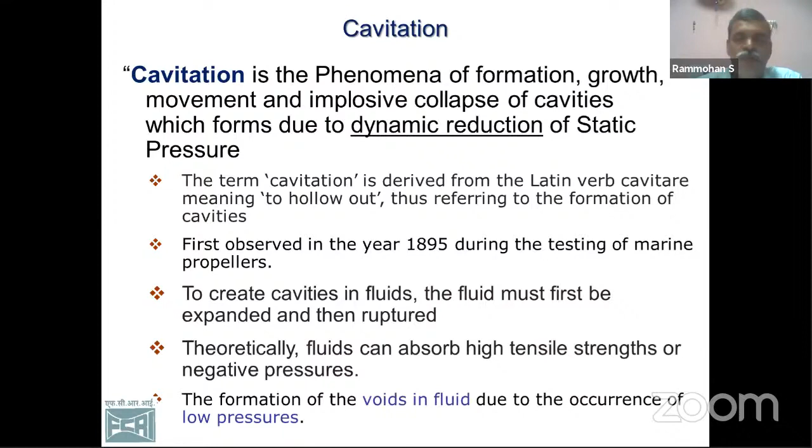So when the pressure goes below the vapor pressure, vapor bubbles will be formed. These bubbles, as they move along the fluid to a higher pressure area, cannot remain as bubbles, so they collapse. And that is what we basically call cavitation.

So this jet is the cause for damage in cavitation. If the bubble is placed close to the wall of the pipe, this entire jet will hit onto the wall, and the velocity of this liquid jet will be of the order of 100 meters per second or more.

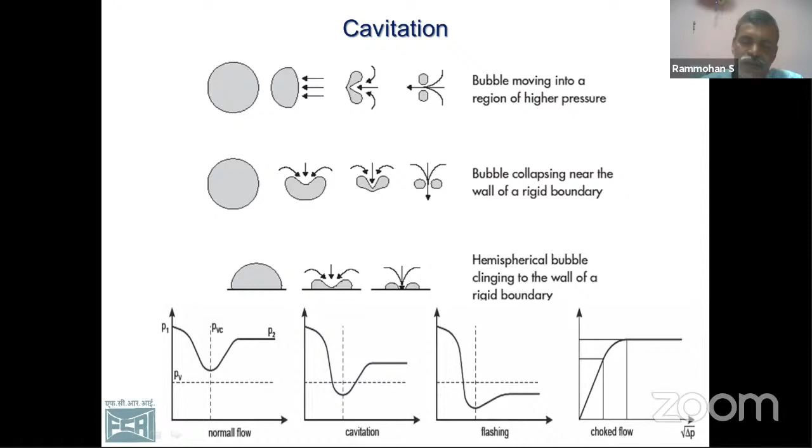So at the outlet of the valve we get only vapors, and we call it flashing. That means the liquid has flashed into vapor. So that is the basic theory of cavitation, and there are basically 3 to 4 types or levels of cavitation.

Incipient cavitation is basically the starting of cavitation. This we can hear as we go close to a valve or orifice plate, you can hear this popping sound. And normally this is acceptable for operation because it will not create much erosion issues, so incipient cavitation is acceptable in the industry.

Critical cavitation means cavitation is taking place continuously. Some places also use this critical cavitation zone, because if you want to reduce the cavitation, the cost of that reduction will be quite high, so people live with cavitation. So in incipient cavitation and constant cavitation, this type of valve is normally used.

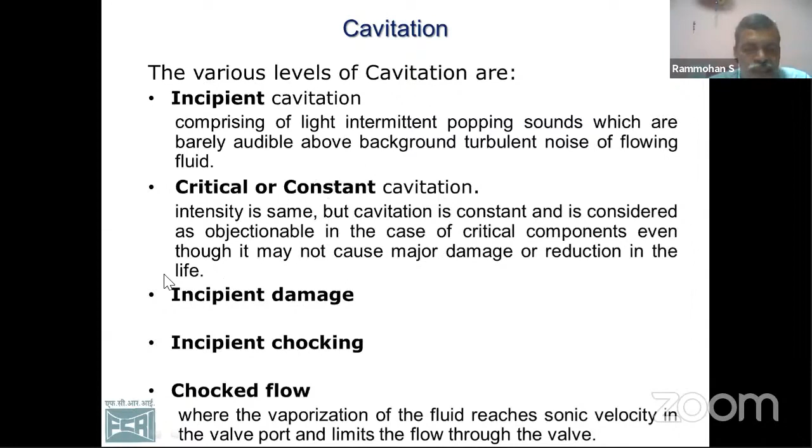Then we have incipient damage and finally choking. These two regions we don't normally operate the system in, but the earlier regions we normally operate the system so that even if there is cavitation, it is affordable. So that is what normally the different levels of cavitation that is experienced in valves or pumps or all those items where the pressure can go below the vapor pressure.

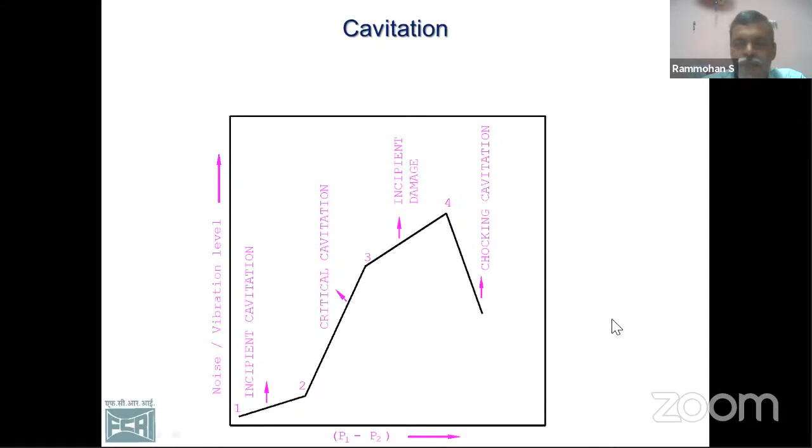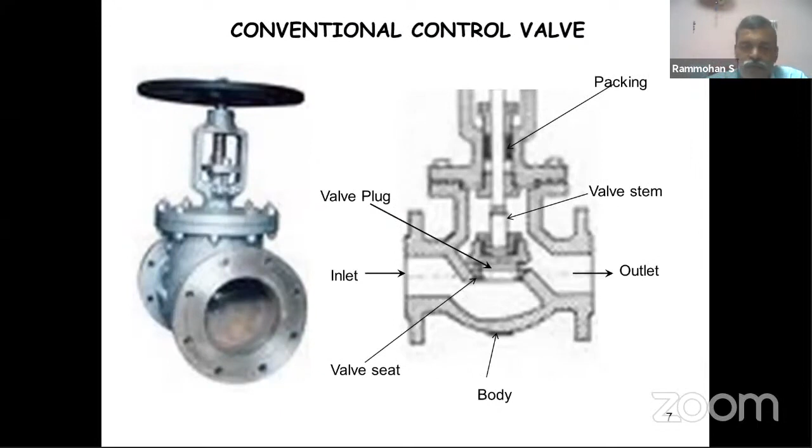The cage is the static member and the plug will be a moving member. The cage may be having different profiles made on it, in the form of holes or some shapes. As the plug moves into the cage, the area of opening changes, and the flow and pressure drop across the valve changes, and accordingly we get a similar pattern.

Whereas in the case of butterfly valves, ball valves and such, we have a rotating member that rotates 90 degrees. As it comes close to the closed position, the area of opening will be very less. When the area of opening is very less, dynamic pressure will increase, velocity will increase considerably, and that will result in reduction in static pressure, and here it can go below the vapor pressure.

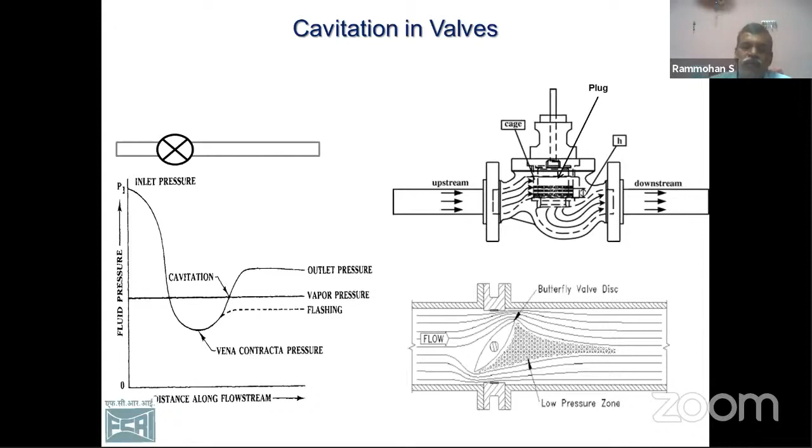And apart from that, in the case of these butterfly valves and ball valves, there is a provision for wake formation downstream of this, which also adds to the cavitation behavior. So now let us see what are the issues associated with cavitation.

The main issue is erosion. In the case of valves, there are basically 3 identified areas for cavitation erosion. One is the incubation area, where the cavitation is started. There will be a small amount of loss of weight, but it is not measurable, so we don't know whether the valve is operating in the incubation period or not.

After the incubation, we reach the constant erosion region, where the slope of erosion is higher, meaning loss in weight over time is greater, so material loss from the valve is quite high. When the material loss becomes high, the surface undergoes something similar to heat treatment, so the hardness of the surface increases.

Then the material erosion will come down. We call this the strongly fractured area, where core erosion will be less. So we are more worried about the earlier two regions in control valves, especially where the pressure drop is very high.

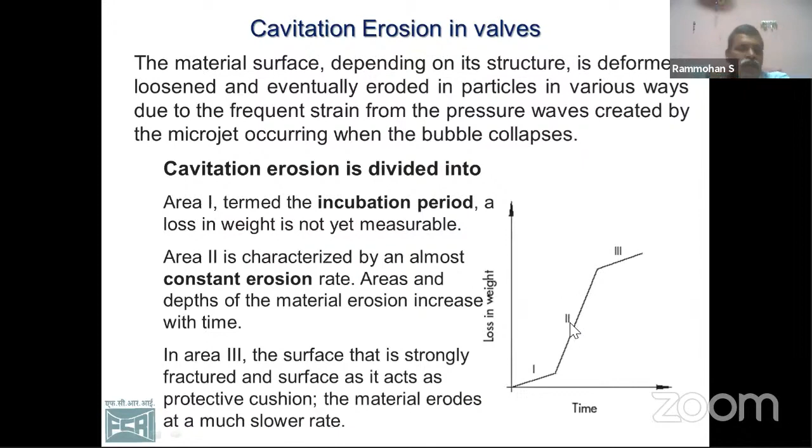Cavitation is normally measured with the help of visual studies. We cannot quantify these things. This is basically a quality evaluation, not a quantity evaluation, so we are not much worried about these things.

Basically, we measure fluid-borne noise, structure-borne noise, or airborne noise. Fluid-borne noise is normally measured with the help of hydrophones, which are nothing but pressure transmitters, basically dynamic pressure transducers, having very high sensitivity, sensing dynamic pressure fluctuations in the flow.

Structure-borne noise due to cavitation: in fluid-borne noise, due to the collapse of the bubble, pressure waves will be generated, and that pressure wave will be in the form of dynamic pressure pulsation, measured by the hydrophone. The same pressure pulsations hit the wall of the pipe or the body of the valve and make it produce noise, and it will vibrate. So noise is measured with the help of hydrophone, whereas vibration is normally measured with the help of an accelerometer.

So normally we use hydrophone, accelerometer, or microphone for measuring the intensity of cavitation.

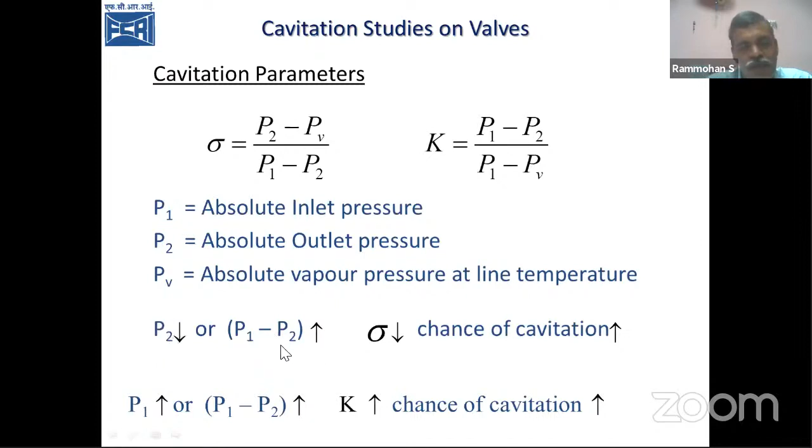So in most cases we play with P2, because pump pressure will be constant, so inlet pressure P1 will be constant. So the only thing we do is reduce P2 and ensure that the valve is cavitating.

This is a typical scheme for measuring cavitation. Here we have the test valve. This is the scheme which I used for my research activities. We have a larger size pipe before the valve so that we get maximum flow and maximum pressure that is reduced further. Then we have the test valve somewhere here, and we take it back to this thing.

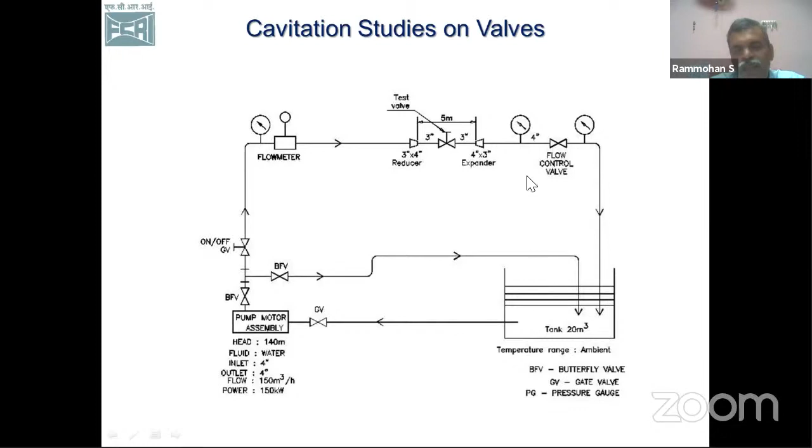So here we have to measure the entrapped air in the water. Then we have to measure the temperature of water. Then we use different sensors like hydrophone, accelerometers, and dynamic pressure transducers for measuring. So this is a scheme of experimentation that we normally use for measuring cavitation.

The hydrophone is normally placed flush with the fluid surface so that whatever pressure fluctuations or dynamic pressure fluctuations are caused by the valve will be picked up by the hydrophone.

Vibrations generated by the hitting of pressure waves on the pipe wall and valve wall will be picked up by the accelerometers. We have not used any sound level meters for this; we have suitable signal analyzing equipment, and that will be connected to a data acquisition system so that we can process the data online or offline to get the required output.

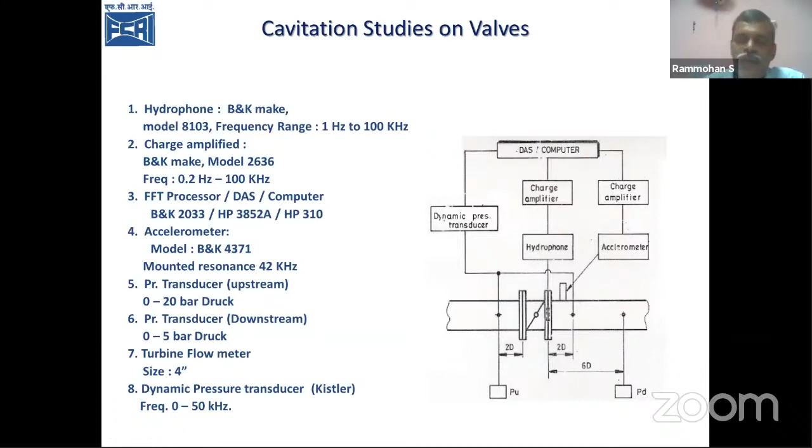So these were some of the profiles what we have used. This is the valve. So what we used is valves of different sizes. Basically here only we used CFD for getting the results. Initially we started with a normal valve, then we tried valves with different profiles and all those things.

This is the valve cage and this is the valve plug. During operation, this cage will be fixed onto the valve and the plug will be moving according to the movement of the handle of the valve.

So we have different configurations. All these trials we have done with CFD, and it was evaluated experimentally also, so that in future the same scheme can be used for predicting cavitation in valves. That's what was the objective of this thing.

The study was conducted on a 75 mm valve, that is a 3-inch valve, and the movement of this valve was only 17.5 millimeters. This is a typical plug and cage commercial design which we refined for our application.

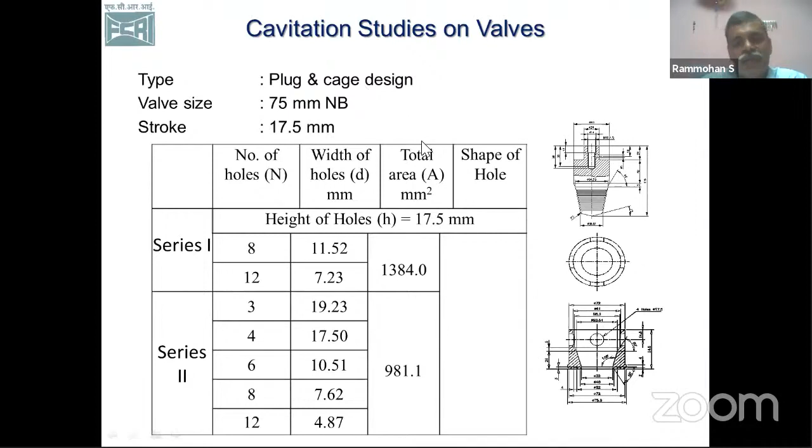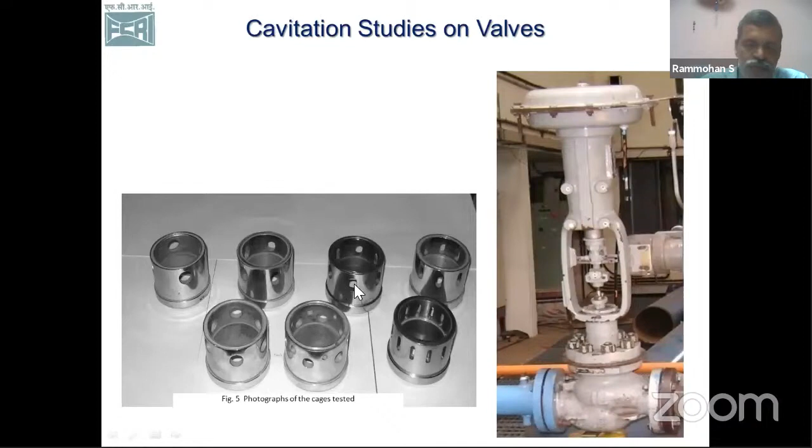So this is the valve what we are using. This is the valve body and this is the moving mechanism we have. This is connected here, this is the valve cage. Plug what I have not included. So as the valve moves into it, part of this hole will be covered by the plug, and through the remaining part water flows.

This is another type we have done for some of our customers. Same studies we have done. So this is the scheme what we have.

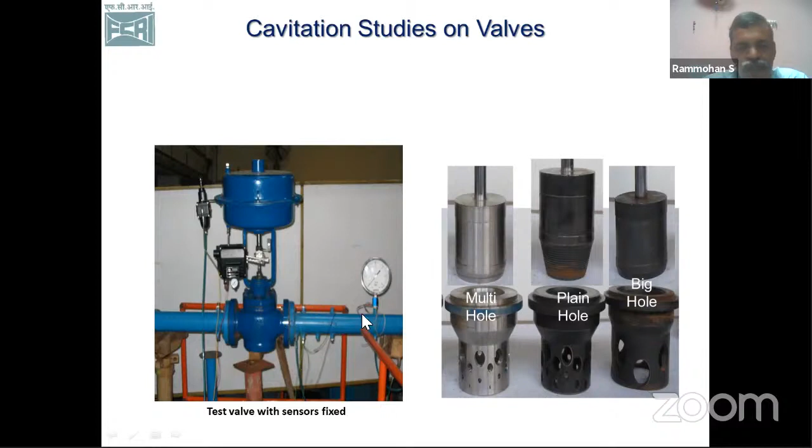So to measure or to see the bubbles that have been generated, we have put a perspex or transparent section after the valve, so you can see the small bubbles that are being generated during the operation.

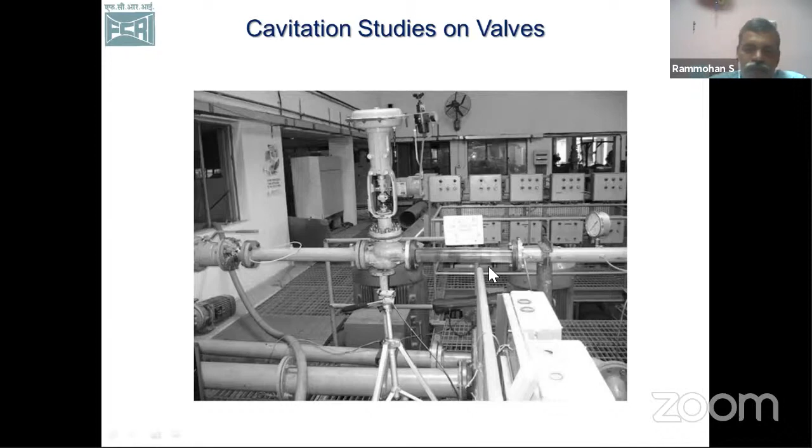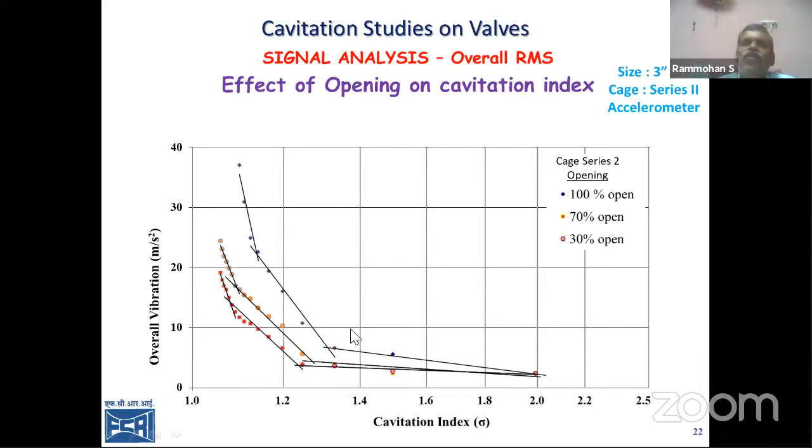You can see the slope change points also moving towards the right, which is saying that this corresponds to 100%, this corresponds to 70%, this corresponds to 30%. So you can see the valve will cavitate early in the case of 100%, but as we reduce the opening, the starting cavitation point also moves to a higher differential.

So this is how we define the valve. We fit the line and we take the R square value. For these two cases, the R square is quite comfortable, but here it is not comfortable, this fit is not quite good, but these two fits are good. You can see there is a clear change of slope taking place. The slope has changed from minus 219 to minus 71, which says that there is a clear change in the cavitation pattern.

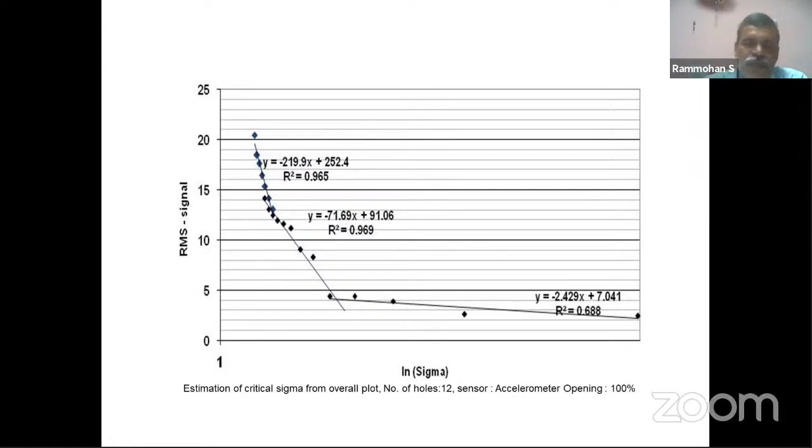So this is another example where we have the same full opening valve, but different areas of the opening were considered.

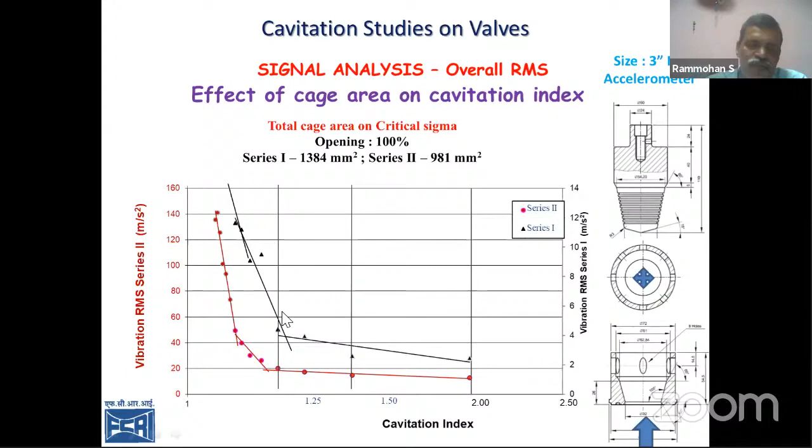Another aspect of what we do is we take the same accelerometer output through an FFT analyzer, that means we do a fast Fourier transform of the data. There we get peaks at higher frequencies, and this is normally due to cavitation, because the frequency of these high amplitude areas is basically depending upon the size of the bubble. As the size of the bubble decreases, the frequency increases.

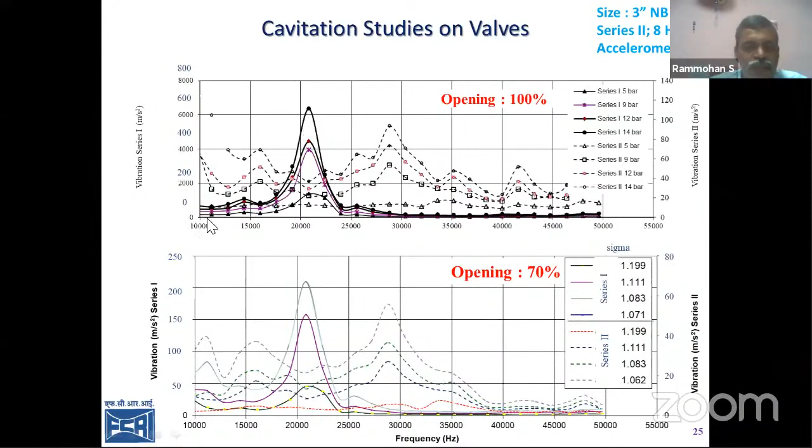So we assume that the mechanical vibrations and everything are removed, and only the pressure fluctuations or whatever is due to cavitation alone is considered. So we remove the data below 10 kilohertz.

We define the pressure inlet and outlet and assume that there is no slip at the boundary. Standard material properties available in Fluent were used for these fluids. Initially we started with single phase with water alone, later we did the same experiment with water and water vapor, with air entrainment inside the fluids.

So finally in our final studies we used tetrahedral grids, and we were using something more than 1 lakh sample elements for covering the core area of the valve.

Initially we tried with 10D upstream and 20D downstream so that we are able to get the complete pressure recovery inside the valve. So we defined the pressure inlet 10D upstream of the valve and pressure outlet 20D downstream of the valve, assuming that full pressure recovery is taking place after cavitation inside the valve.

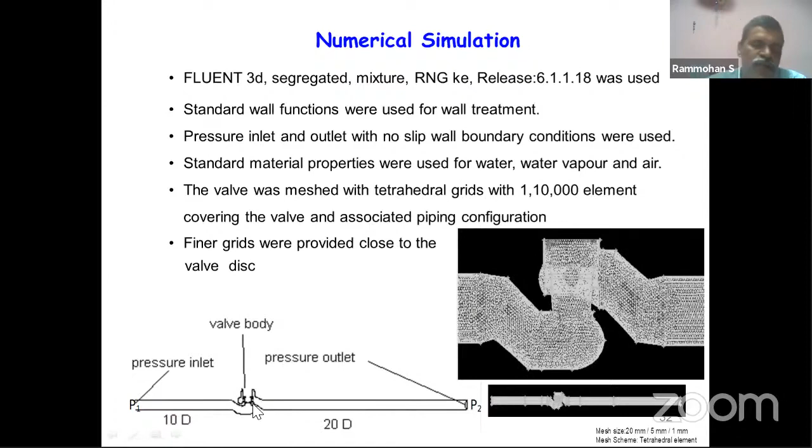Basic assumptions were that the flow is three-dimensional, incompressible. We assume that since we have provided the 10D upstream diameter with flow straighteners and all, the flow is uniform and unidirectional at the inlet, and there is no velocity at the surface of this thing. Turbulence was modeled with the two equation k-epsilon model.

And in our second phase, that is the mixture model, we used void fraction of 0 at the inlet, assuming that there is no air entrainment inside the water.

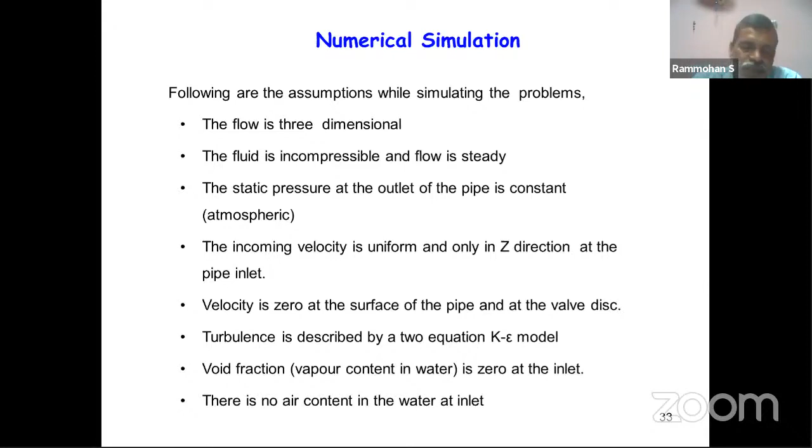So with this we studied, we varied the inlet pressure from 0.1 megapascal to 1.7 megapascal, which is equivalent to 1 bar to 17 bar pressure at the inlet, and outlet pressure was maintained because it was freely going to atmosphere.

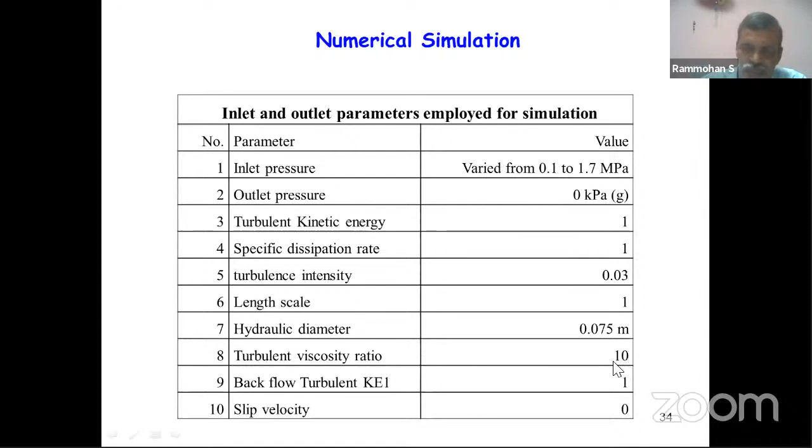So that is what it means. Outlet pressure is 0 because we use gauge pressures. Initially, we started with turbulent kinetic energy as 1, specific dissipation rate as 1, and hydraulic diameter as 0.075 meters because we tried with the 3-inch valve. Turbulent viscosity ratio considered for initial starting was 10. With these conditions and the material properties, we took it directly from Fluent.

No modifications were done. With these trials, we modeled this thing initially. This is for just trials we have done. So we tried with the 5 mm mesh size and 20 mm mesh size, and we found that 5 mm is good. So this is profile one.

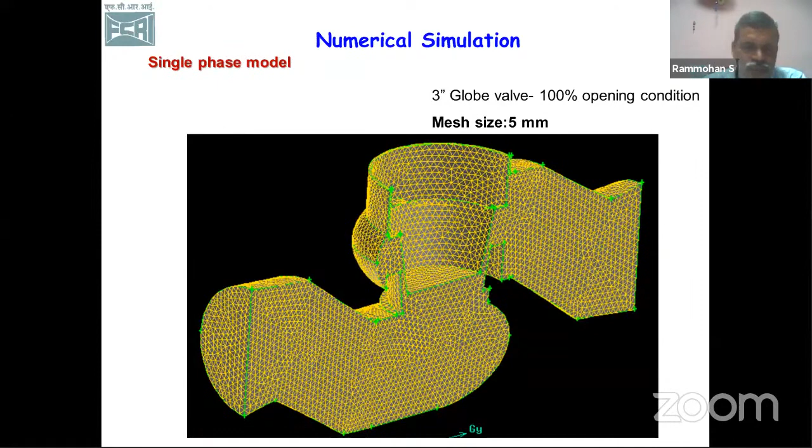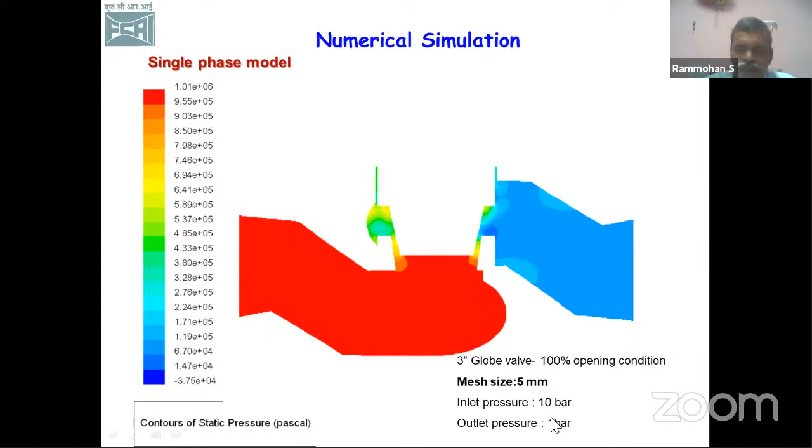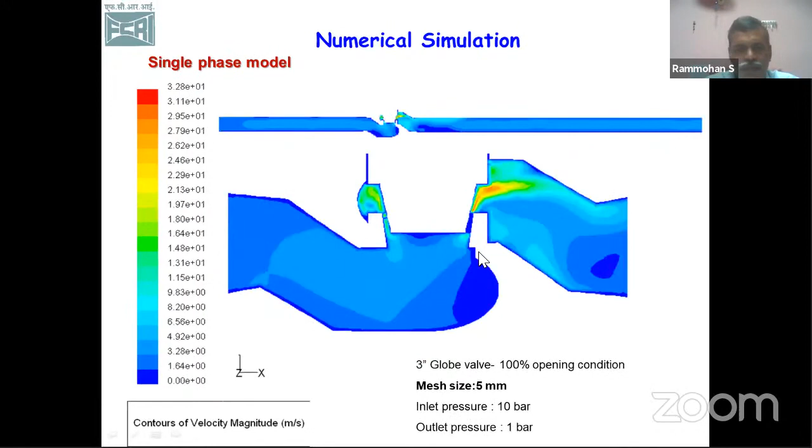Same thing, this is the velocity magnitude. Here the area is very small, so we get maximum flow here, and we have minimum static pressure here. We must start with Bernoulli's equation. This is the velocity vectors. Maximum velocity is taking place here, so because of this, these are all complementary issues.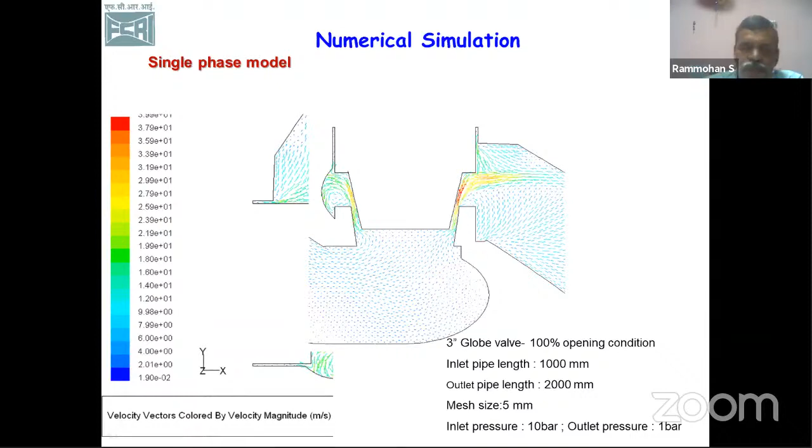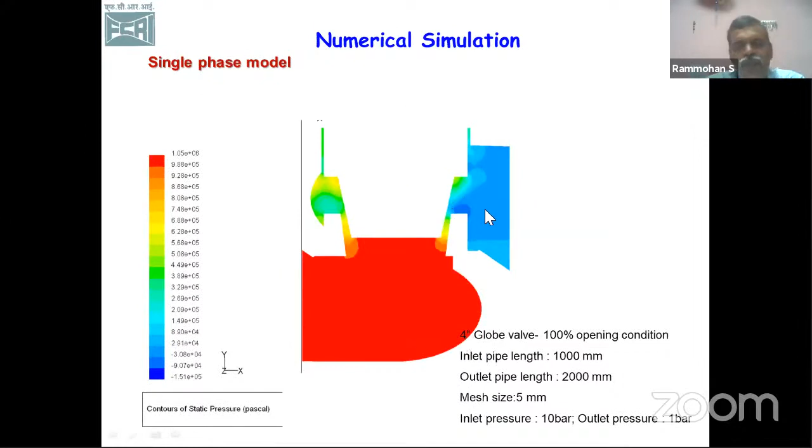So we have used 8 holes in the profile, 12 holes with a flow area of 1384 mm square. Another series with 981 square mm with a different hole profile. These hole profiles are basically used to improve the cavitation characteristics of the valve, which is not covered in this.

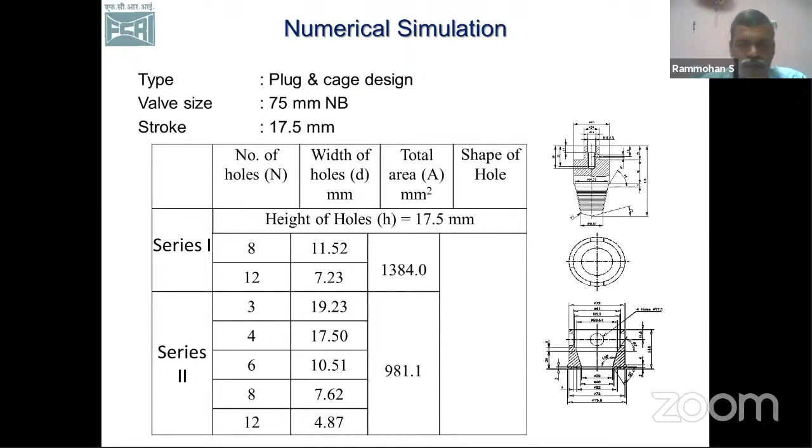So this is the grid what we have used for the same thing we discussed. We have used tetrahedral elements and totally more than 1.5 lakh grids were there. So 10D upstream, 20D downstream, and we have finer grids inside the valve. You can see the opening here. In this case, we have 4 openings, one here, this side 2, and one on the other side.

And as such, the displacement of the plug was 17.5.

So here, this is basically a single phase model. We assume that there is no cavitation taking place because we have not enabled the cavitation model here. So we just studied what is the minimum static pressure in all the cases. We have used only very low differential pressures so that we did not want the valve to cavitate.

So the differential pressure was 1 bar, 2 bar, and 3 bar, and the configurations we used were 3 configurations. Flow rates what we measured and what we have obtained from CFD were also calculated here. This is the value we got from CFD, and it was comparable with the actual case.

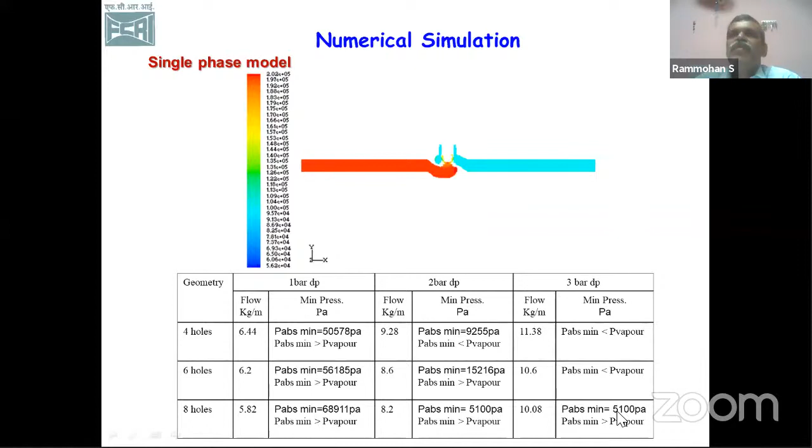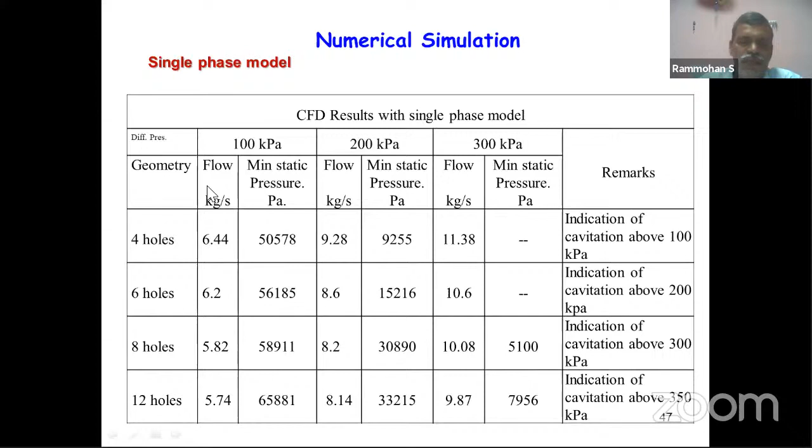But if you can see, in the case of 3 bar differential pressure across the valve, the minimum absolute pressure was 5,100 pascals. This says that the valve can cavitate, but this will not give a clear picture. So this is a more elaborate thing where we measured the minimum static pressure and we can have cavitation.

So these are some of the pictures we took from Fluent, for different profiles, for 1 bar pressure, for static pressure as well as velocity. So we found that the single phase model will not give any results.

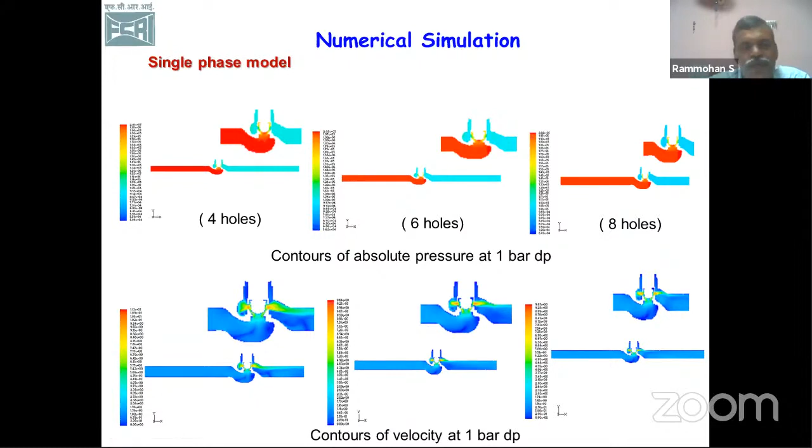Then we went for a 2 phase model. In the 2 phase model, we have a term for vapor generation, which is basically a function of the void fraction of vapor present in the fluid and the void fraction of gases present, that is the gas already dissolved in liquid or water. And we have other terms like constant density of the liquid, density of the vapor, pressure of vapor, and inlet pressure, and the density.

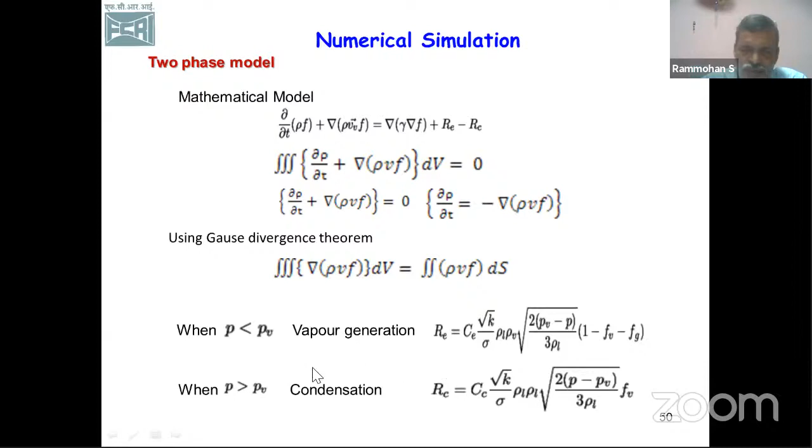So this is the term that we get from the Rayleigh-Plesset equation, which is the basic equation for cavitation in valves. We are not having this condensation issue; in our case, we have only vapor generation. So we are worried about that only.

When we enable the cavitation model in Fluent, it will ask for many things. We have to consider three fluids here: one is air, that is the amount of gas dissolved in the liquid; this is the basic liquid flow; and water vapor that is being generated due to cavitation.

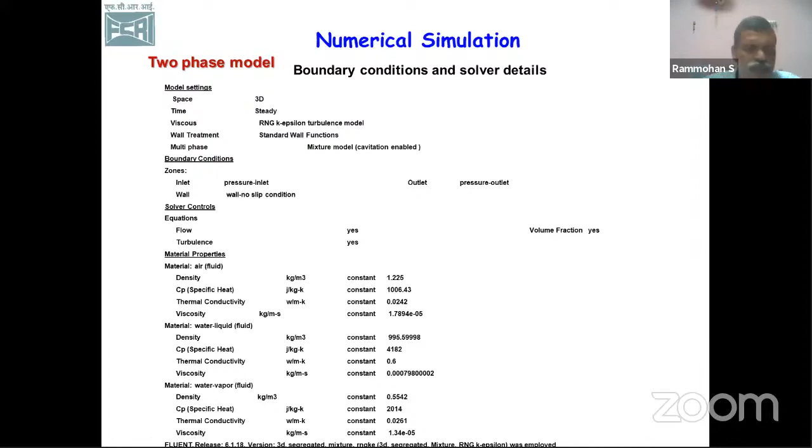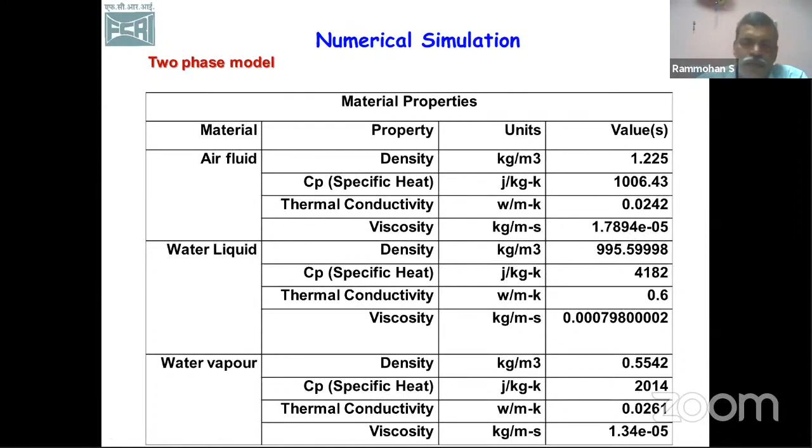These are all the basic initial conditions we have given, and fluid properties we directly took from the Fluent library, so we didn't do anything. Based on that, we did trials for flow rate, volume integral, average volume, mass integral, and mass average. We used a two-phase model, a mixture model, and the cavitation model was enabled in Fluent.

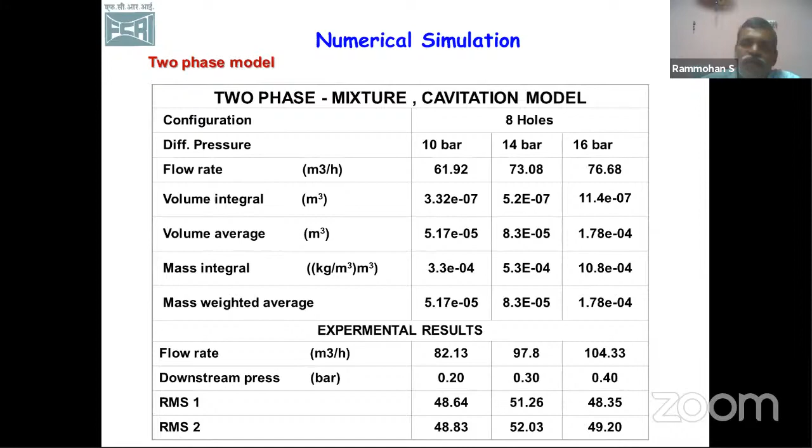Finally, for different differential pressures across the valve, we calculated the corresponding sigma, which is defined as P1 minus P2 divided by P1 minus PV. Then we calculated the mass flow rate through the valve.

We calculated the vapor fraction multiplied by the density of the mixture to get this value, looking at what is happening inside the control volume we decided. We also measured and noted down the kinetic energy inside this region. We used basically 3 parameters.

One is turbulent kinetic energy, second is the product of mixture density and vapor fraction inside the pipe after the valve, then the delta of this product of mixture density and vapor fraction inside the pipe. These 3 parameters we studied for cavitation.

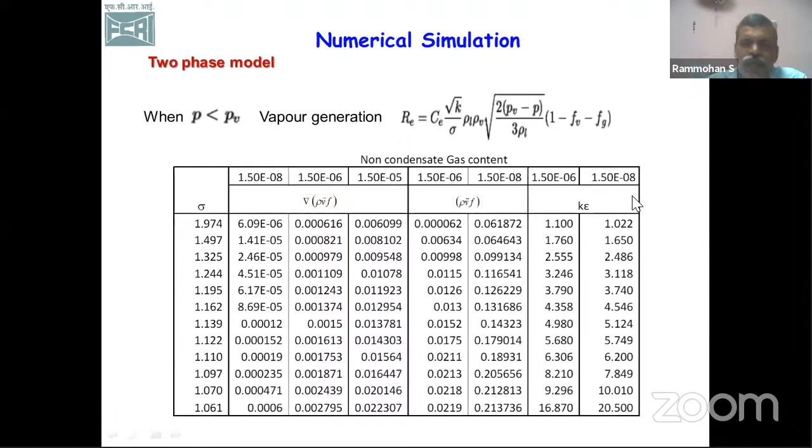In all these cases, we calculated the amount generated and plotted a graph for all these 3 parameters. Here it is delta of rho into void fraction for the vapor phase.

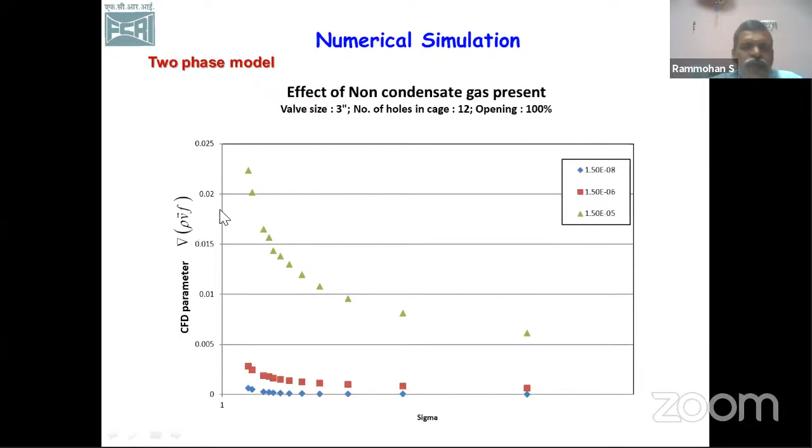We can see when the gas content is low, we get a lower value for this parameter. This is applicable for all the cases. For turbulent kinetic energy we have done it for 2 cases only, and for the -5 case we have not done it.

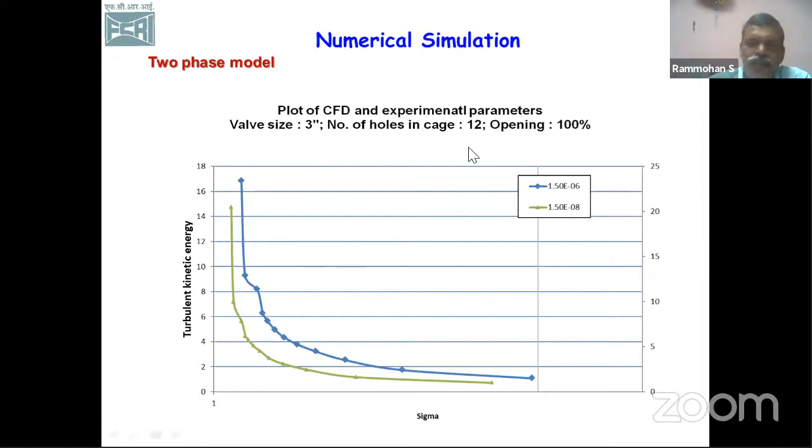All these things were done for a 12-hole cage, 100% opening, for 3 cavitation parameters. Same thing for a single case, full opening, for a constant gas content - how it behaves. You can see all are showing a different amplitude, but the pattern is the same.

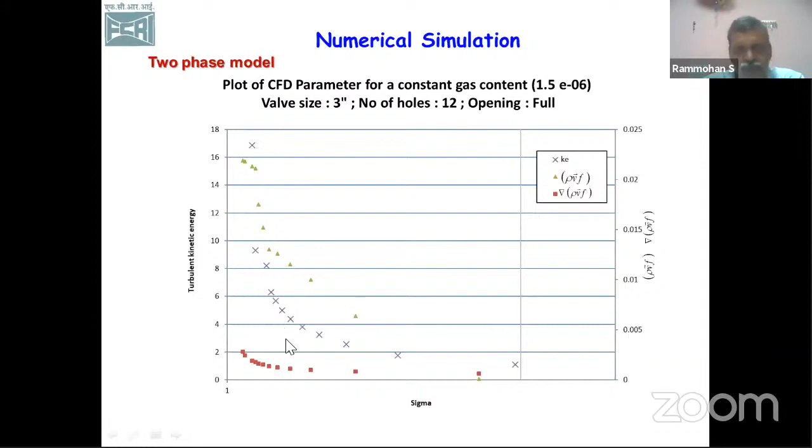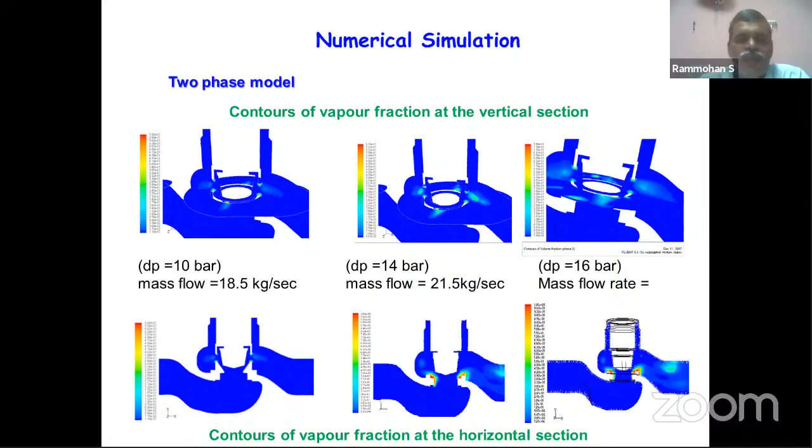Now we can use the same thing to compare with our experimental results. Here I have compared this against vibration, for a varying gas constant.

Non-condensable gas present - we don't know the exact amount of non-condensable gas available in the system. We can see that in all the cases the trend is more or less the same; differences are mainly because the scale is not exactly the same.

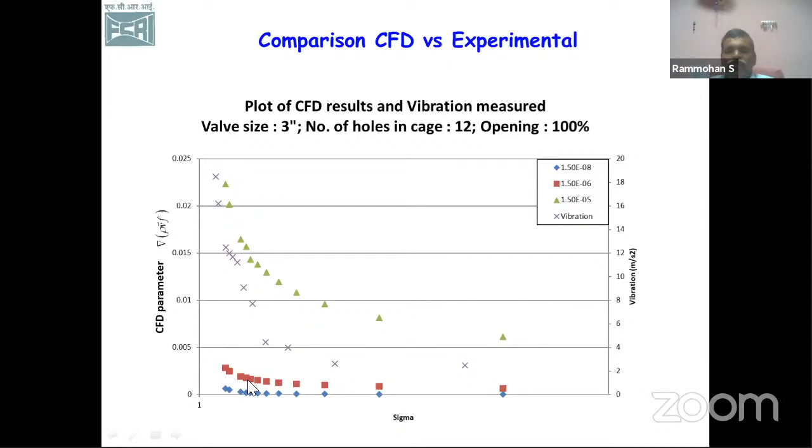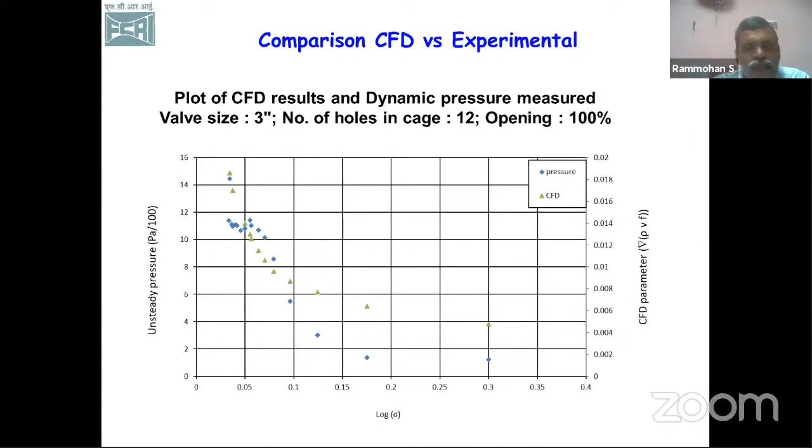So same thing, earlier I have shown it for vibration, whereas here I have shown it for pressure fluctuations, dynamic pressure fluctuation. You can see in all the cases the pattern is more or less the same. This is for varying that gas.

Now we can see how this can be used for our comparison purpose. So these are the values we got for CFD results, and these are the values we got with vibration, and the experiment was done on a 12-hole cage, full open conditions. We plotted two graphs, straight lines, intersection points were taken, and we can see that the intersection point for vibration, that is the experimental thing, was around 1.254, whereas for CFD it was 1.24.

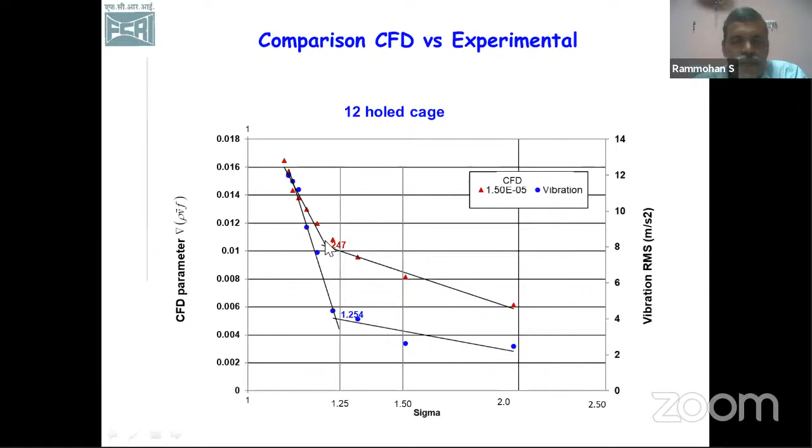It's very close, we are able to meet. Similarly, the same thing when done for a 6-hole cage, so it will cavitate early. That's why for experimental we got 1.33, and CFD it is 1.29. So that is a variation of something like 3 to 4%. That is the only variation we could observe between CFD and experimental evaluation. That's all I would like to share with you.

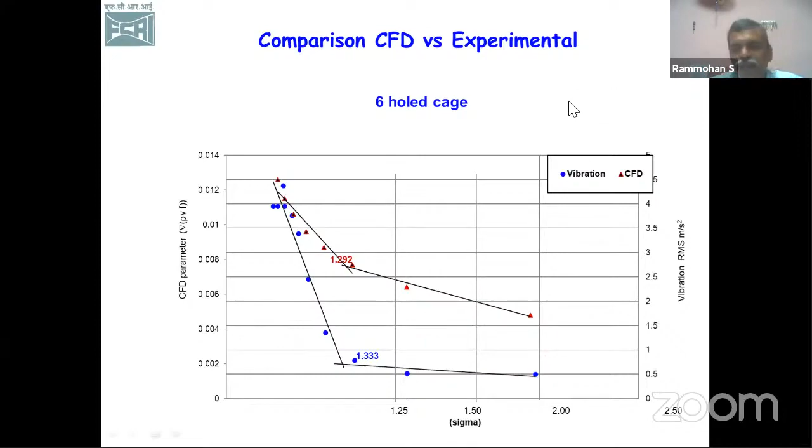So basically CFD is a good tool wherein you can minimize the number of experiments and use it to the maximum. I have one more example where I can show you another case where we have used this.

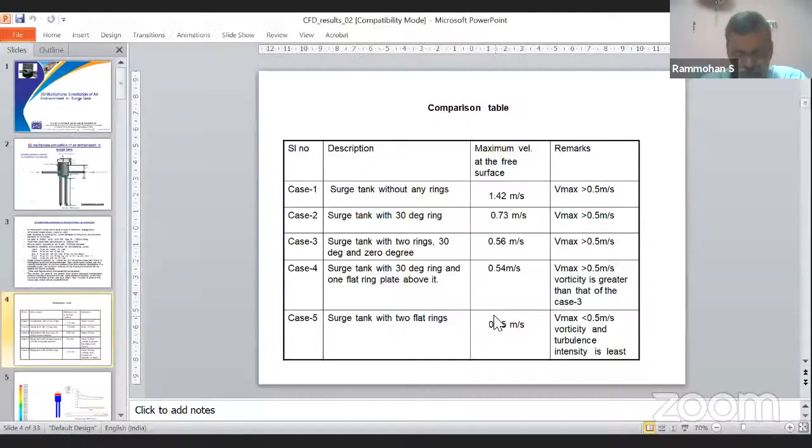So here what we have done is basically a simulation of a surge tank. This was done for IGCAR where they use liquid sodium as the actual fluid, but we did the experiments with water. So we have 2 inlets, 4 outlets, and a surge tank.

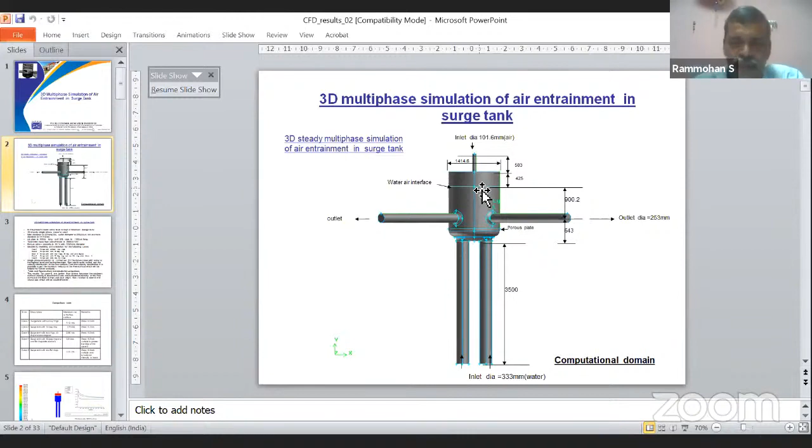So we want to minimize the height of the water. Water is coming from the bottom and goes through these 4 outlets, and we have a free surface at this point, and we want to avoid the presence of any air entrainment in this case. So that was the study we did here. Based on this study, we have developed some devices.

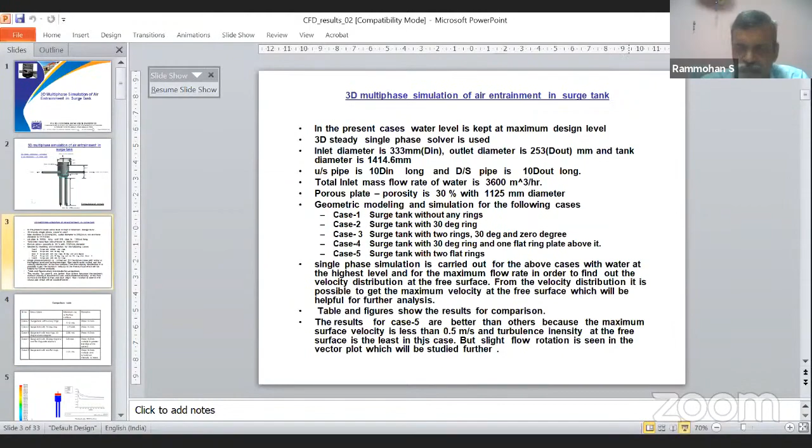Indira Gandhi Centre for Atomic Research gave us the maximum design level. Here also we used a 3D single phase solver because we didn't use a 2-phase solver here. Basically in this case we used the surface velocity as a measure of air entry.

So here the inlet was 333 mm and outlet was 253 mm. These were all given by our customer, and we did different cases like without any rings, with 30 degree rings. So I'll show these things.

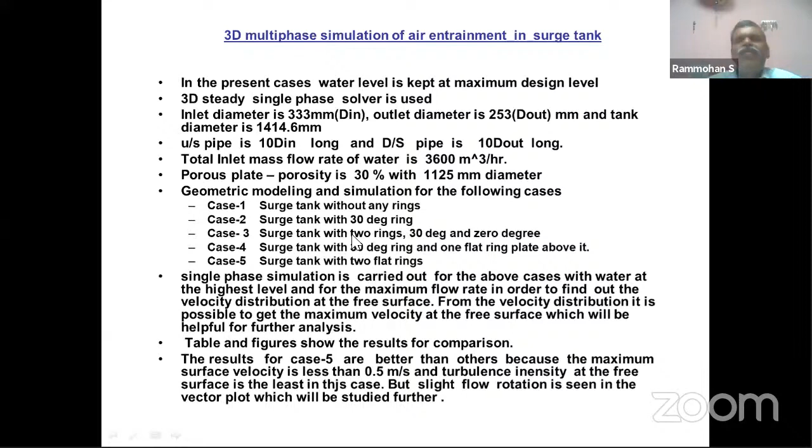So our study was based on finding the maximum free surface velocity. Air entrainment is a function of free surface velocity. If the free surface velocity is less than 0.2 meters per second, we can assume that there is no air entrainment.

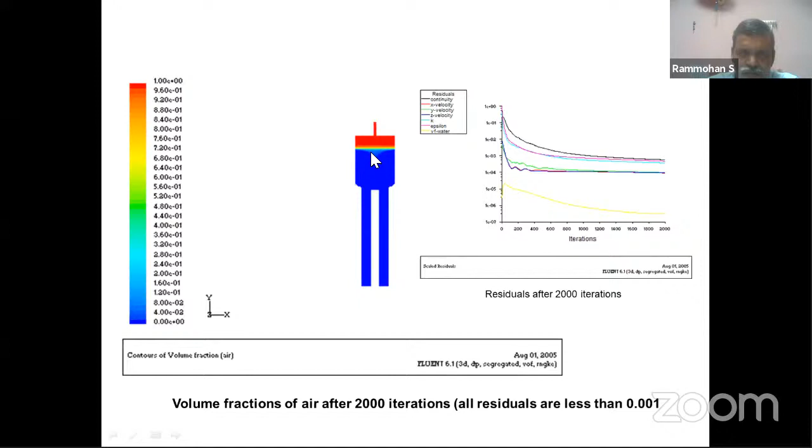So we tried different devices with CFD, and did 1 or 2 trials experimentally to verify the air entrainment. This is a typical case where you can see the volume fraction. The air is here, so we have water here, air here, compressed air here. Water is coming from the bottom and going through 2 limbs on this side. Because of this, the air is getting entrained and that is going along with the fluid.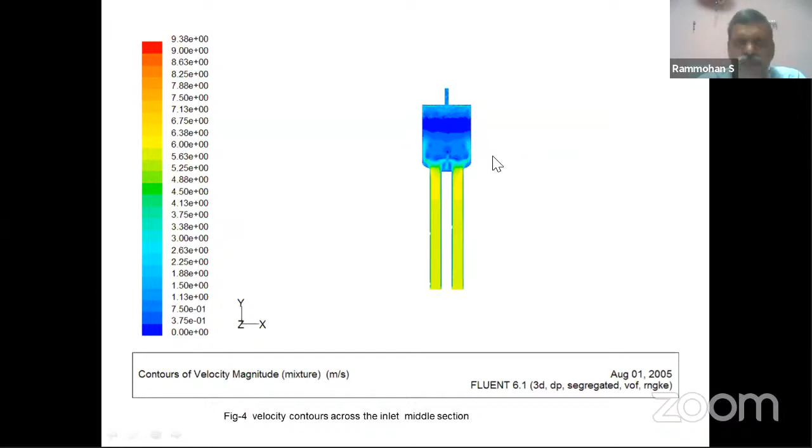This is the velocity profile. So we have provided a plate here, that is why we have a maximum velocity. This is a porous plate wherein we have provided porosity around 0.7, or 70% porosity. So we have the maximum velocity coming here, and it goes here, and the flow is from the sides.

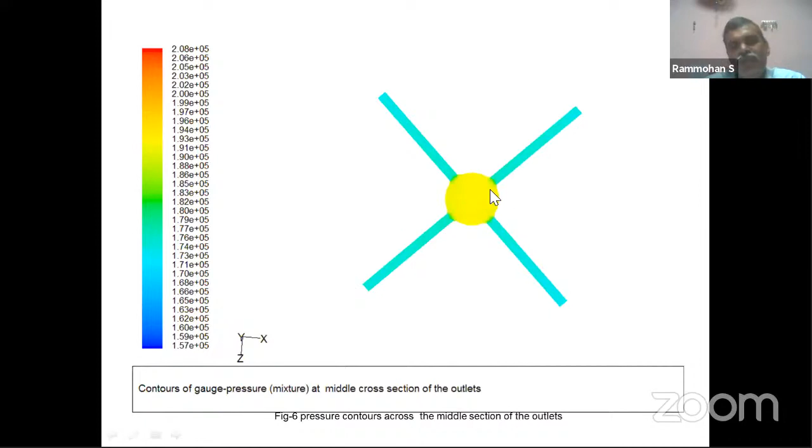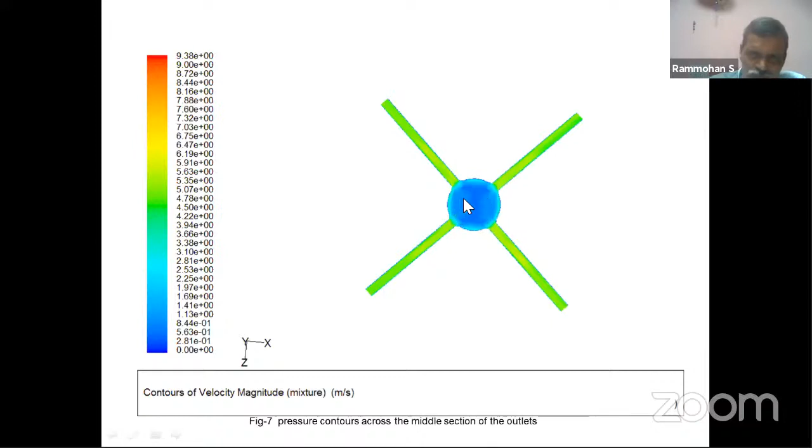This is the gauge, that is the static pressure profile at the middle cross section, where we have the 2 inlets here and 4 outlets. You can see the velocity magnitude. In this case, we have a 5 meter velocity, that is the standard velocity, whereas inside we have velocities going higher in some places. This is a 10-inch pipe and this is having a diameter of 1.4 meters, so the velocity here will be quite less.

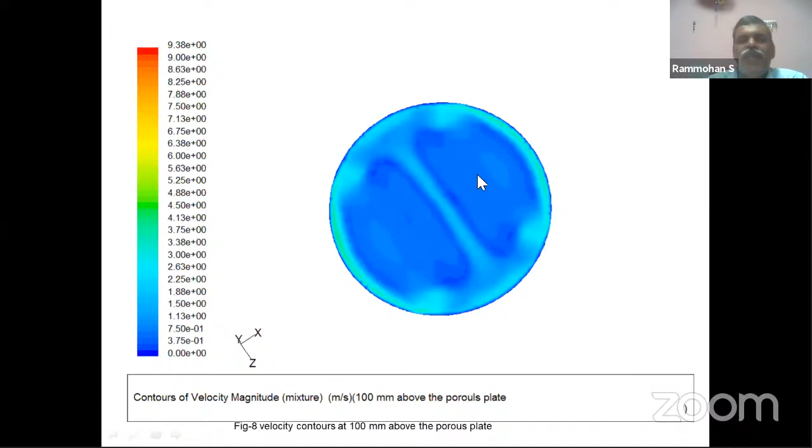So here you can see, because of the presence of the 2 inlets, velocity is minimum here, and this presence of the 2 inlets is shown here. This is from CFD itself.

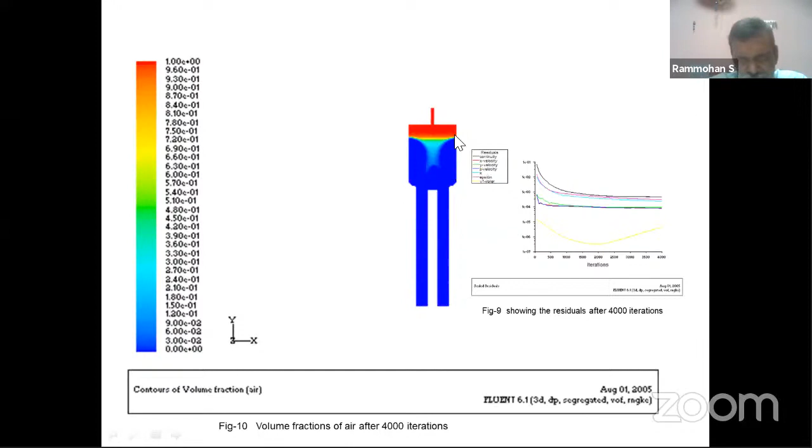This is basically the volume fraction of air. You can see the air is getting entrained here. So we have the 4 outlets here, and air is getting entrained and going through this.

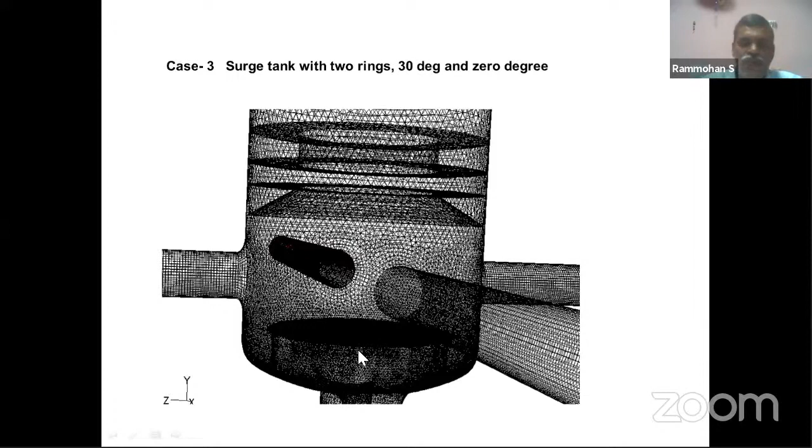So this is a study where we modified this thing with different devices inside. We provided a pepper-pot type of thing with a perforated plate, and different types of deflectors - this is a 30-degree deflector, this is a straight deflector. So water will go through this pepper pot, then top, and then go to the 4 outlets.

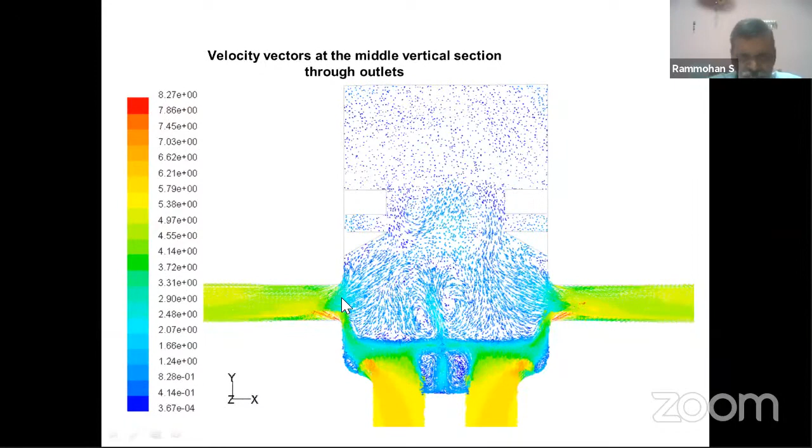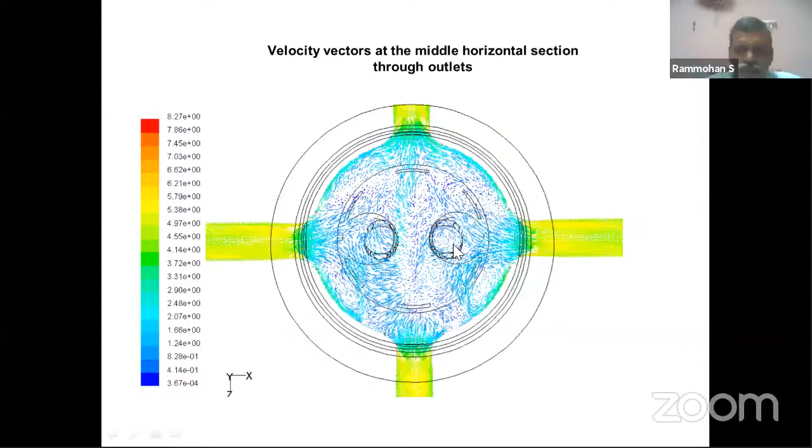So here you can see this is coming here. This is the velocity vector, and you have the minimum velocity here. Once you see the volume fraction, we'll be able to get a more clear picture about this thing. These are the 2 - basically we want to measure the surface velocity.

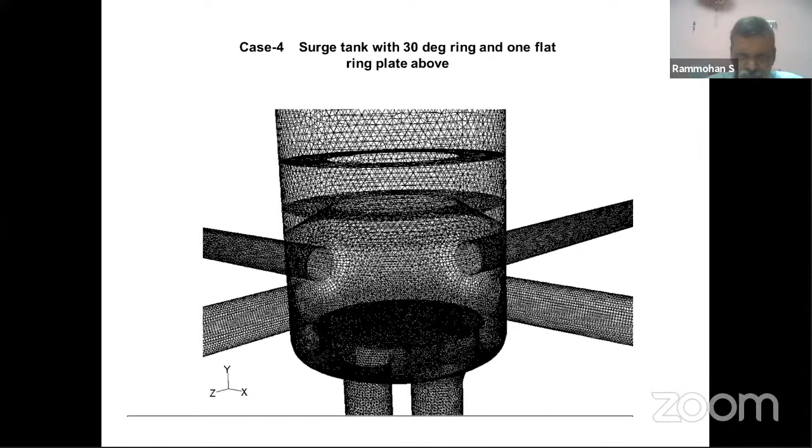And get the sense of fluid coming. Different profiles we have tried here. And this was our experimental scheme where we have the surge tank, 2 inlets from this side, and 4 outlets.

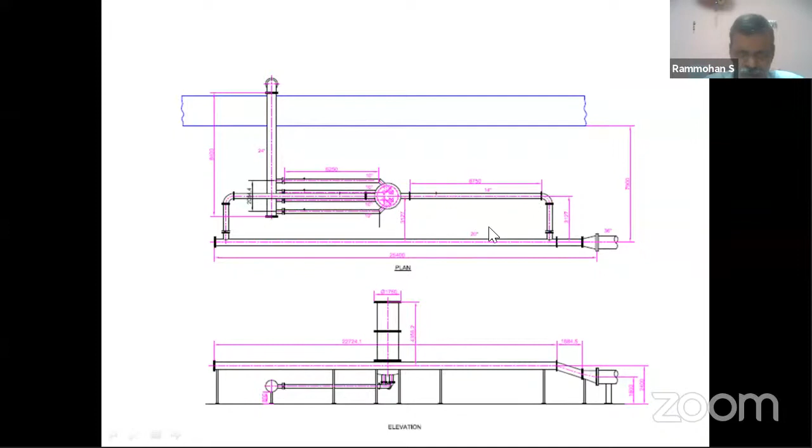So this is the plan of this thing. We have the surge tank here, 2 inlets, 4 outlets going to the sump. And this height of the surge tank was around 5 meters height - from here it was 5 meters.

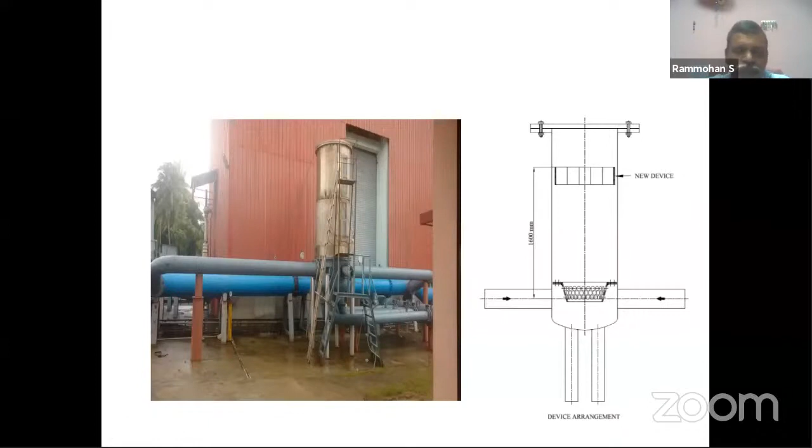So this was a transparent section where we could see the free surface, and if there are some air bubbles coming, that also can be seen. We used our laser velocimeter, just for capturing the data - we used our laser source and camera for getting the presence of gas bubbles, where we can see up to a maximum of 0.1mm or 1.5mm diameter bubbles in this.

So these are some of the devices we designed based on the study, and some of the designs we tried here. Whatever we got as optimum, we experimentally verified whether there is air entrainment taking place at the desired water level.

So that's all about CFD, some experimental evaluation of CFD. I cannot show any graph for this because it is purely a visual study wherein we can see the presence of air bubbles and formation of vortices at the free surface only - that was studied here. So there was no quantification in this study, only a qualitative study was conducted. That's why I could not show any graphs or anything else. That's all I would like to share with you.

So what I suggest is CFD is a good tool wherein we can reduce the experimentation and do the activity in a very fast manner. Because CFD will not take time, whereas with experimentation we have to modify the model accordingly - it will take a lot of time and effort is also quite high, and it will be costly. So cost can be reduced with the help of proper designing of models using CFD. That's all I would like to share with you. If you have any clarifications or doubts, we'll discuss.

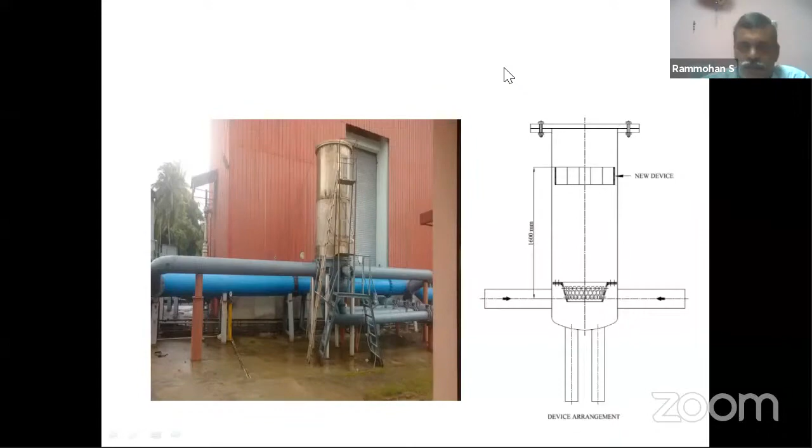This type of experimentation is very rare. What I feel is that by seeing your facilities and your explanation, the people or the faculty will get a feel for how sophisticated and precise experiments are conducted - what care is to be taken and how painstaking it is to conduct the experiment. That will only be experienced, and by experiencing only can we feel the pain required in experimentation.

Okay, you started your presentation with cavitation. Usually in textbooks, we do not get that level of detail you have given - the formation of the jet, how the jet impinges on the wall, and how the pitting is formed, etc. We do not get this in our fluid mechanics or fluid machinery textbooks. So this in-depth explanation will actually give insight into how cavitation damage occurs in fluid machineries.